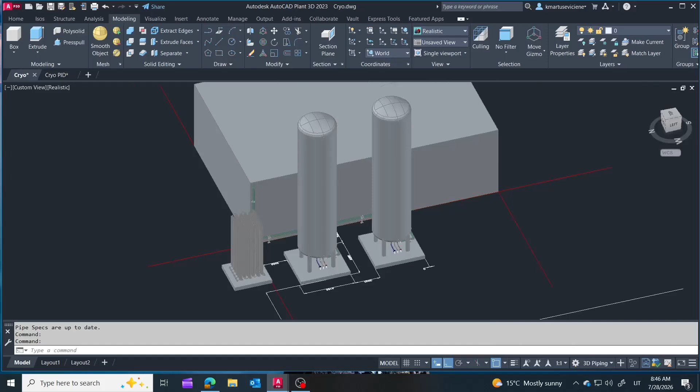In part 1, we built the complete cryogenic tank layout and routed the first pipeline. Today we're connecting the vaporizer, the cryogenic pump, and the gas return line while making the project look much closer to a real industrial installation. Let's continue.

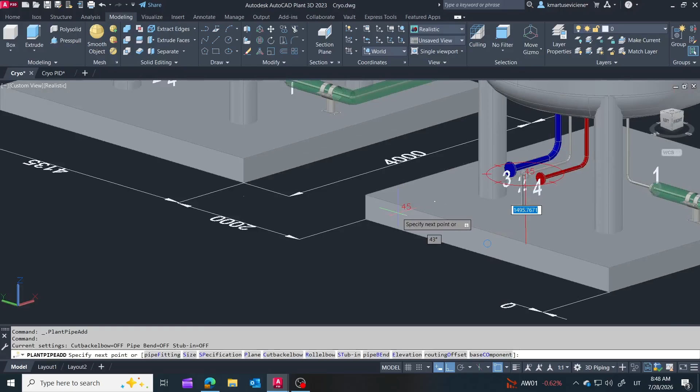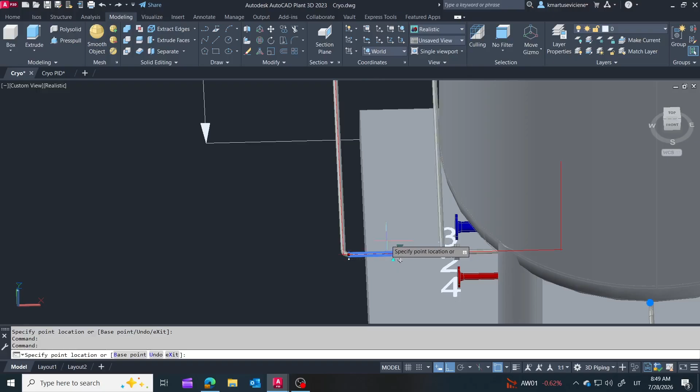In the previous video, we assigned the tank nozzles according to the P&ID. In this episode, we'll connect the second nozzle to the vaporizer. I aligned this pipeline with the foundation. During installation, workers can simply measure the distance from the edge of the foundation, making the pipe much easier to position accurately. Since the vaporizer connection is lower, I raise the pipeline only to the required height. This reduces the amount of support steel needed and saves material.

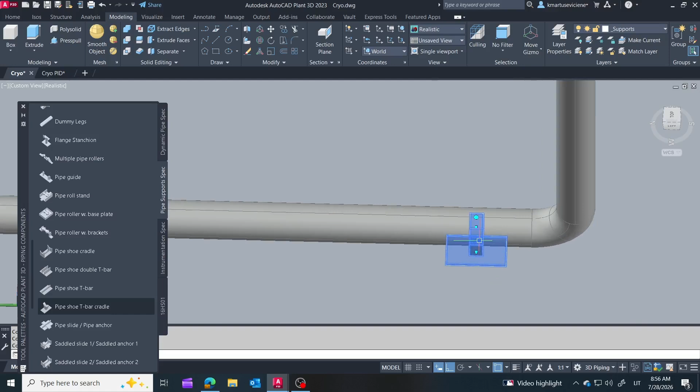Now I'm adding the pipe supports. Since this pipeline feeds the vaporizer, I let nature do part of the work. As the liquid nitrogen absorbs heat from the surroundings, it gradually starts to vaporize before reaching the vaporizer. Because of that, I can use simple pipe supports here. However, the supports should still be made of stainless steel, as carbon steel becomes brittle at cryogenic temperatures.

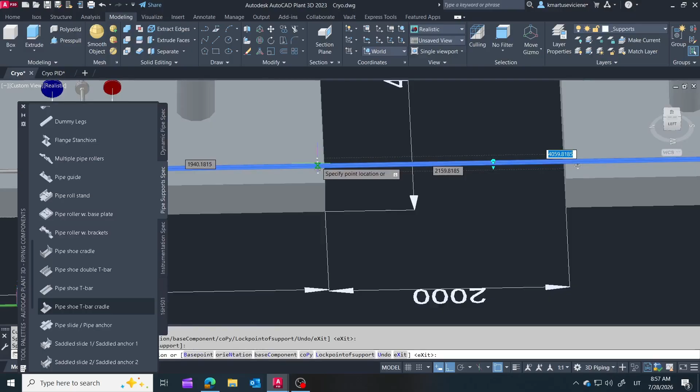Pay attention to how I place the supports. Using dynamic tracking, I position them at precise locations instead of placing them randomly. This gives us clean, round dimensions in the isometric drawings and orthographic views, making them much easier to read and fabricate.

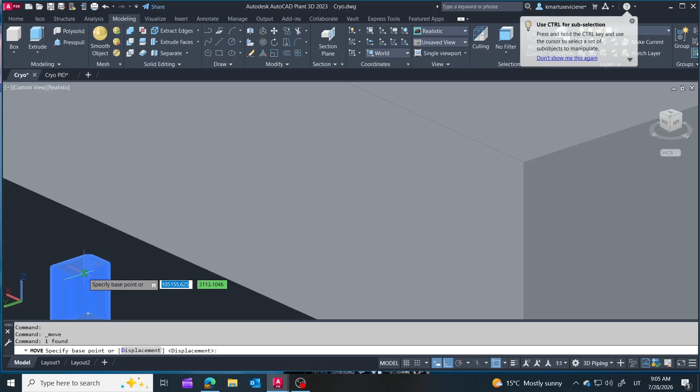This time, I'm using the same support design but adding a steel base plate at the bottom, which will be anchored to a concrete foundation. In other projects, when I want to avoid involving the civil team, I simply use supports with adjustable legs instead.

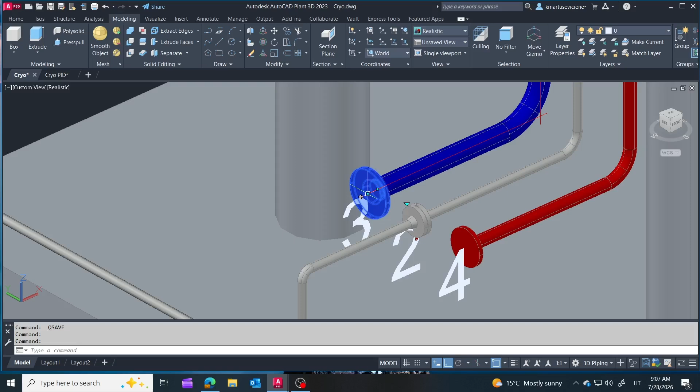Now let's start routing the DN65 pipeline to the cryogenic pump. This pump is used to transfer liquid nitrogen from the storage tank into road tankers. Before routing the pipeline, I'll adjust the pump foundation. I'll create a 600 by 600 millimeters concrete foundation at the same elevation as the tank foundations.

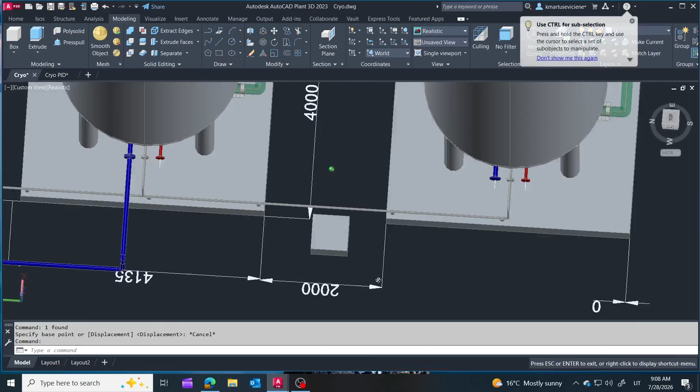Now I'll search GrabCAD for a suitable 3D model of the pump. There aren't many results, so it's easier to choose one. Since there aren't many models to choose from, I'll use the skid unit and simply extract the pump from it. This is a very nice model, so let's take a closer look.

On the suction side, we have an automatic valve. On the discharge side, the line already includes a cool-down line and manual cryogenic valves. By the way, I won't just use the pump from this model, I'll also reuse the valve models and the thermal relief valve.

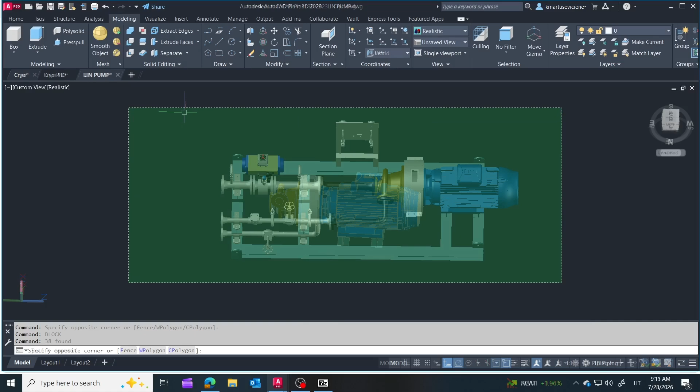Now I'll extract the pump from the assembly and place it on the foundation. I'll place the pump in the center of the foundation and move the entire unit slightly farther away from the tank foundations to leave more space for the piping.

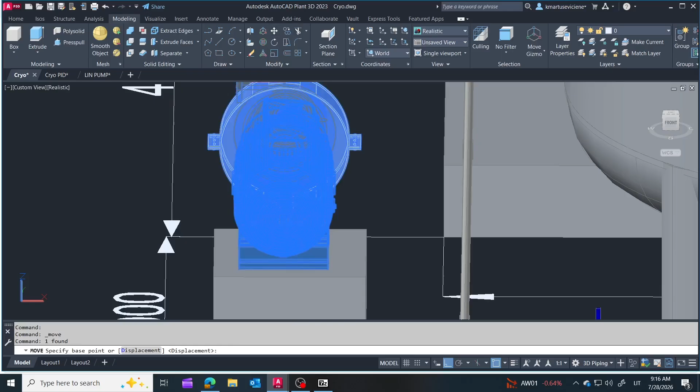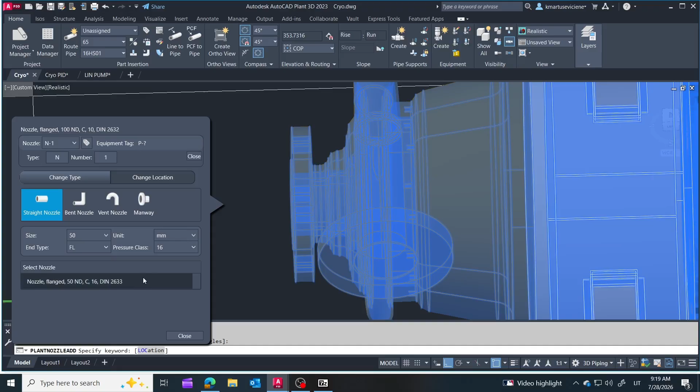Now it's time to convert the solid model into AutoCAD Plant 3D equipment. Since we simply picked the first suitable pump model we found, it actually fits this project quite well. The pump connections are DN40 and DN65, which match the sizes of our pipelines. For this workflow, we're not focusing on hydraulic calculations or equipment sizing, so I'll connect the pipelines directly without using reducers. In a real project, the process is different.

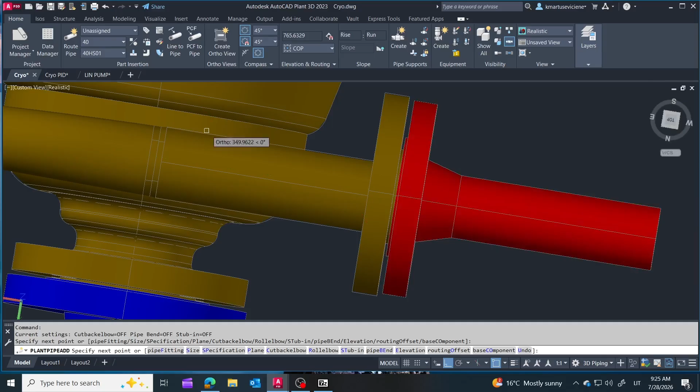First, you determine the required flow rate and size the piping accordingly. Once the pump manufacturer provides the final pump with confirmed nozzle sizes, you adjust the piping and add reducers if necessary to match the pump connections. I think I'll place the pump between these two foundations. If I position it next to them, it would block the truck access route, and I'd like to keep that area clear.

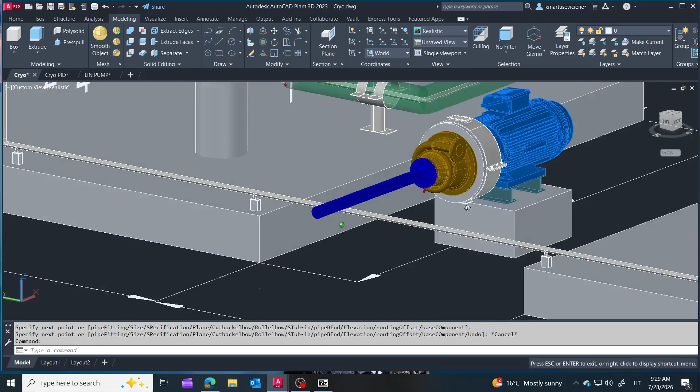Cryogenic pumps require special attention because they're handling liquids that are very close to their boiling point. Even a small pressure drop or heat input can cause part of the liquid to flash into gas. If vapor bubbles form at the pump inlet, cavitation can occur. When those bubbles collapse inside the pump, they can reduce performance, create vibration and noise, and eventually damage the impeller.

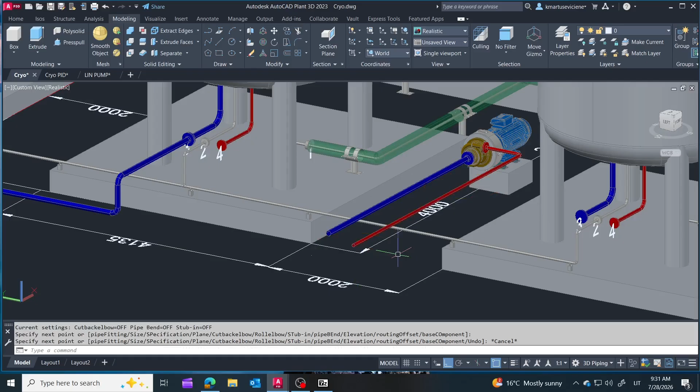That's why the suction line is usually kept as short and straight as possible with minimal pressure losses. The pump is also positioned below or close to the storage tank outlet whenever possible, ensuring a positive inlet pressure and helping to keep the nitrogen in its liquid state.

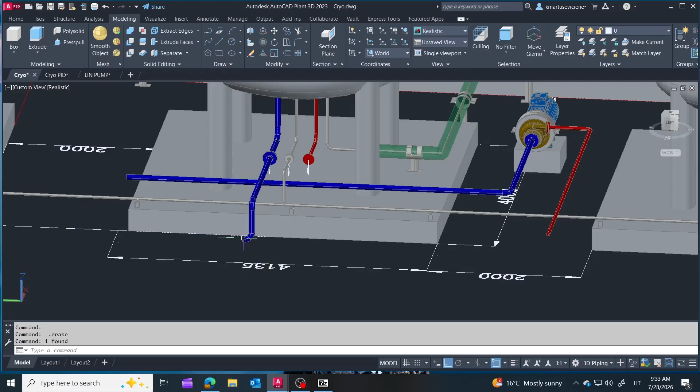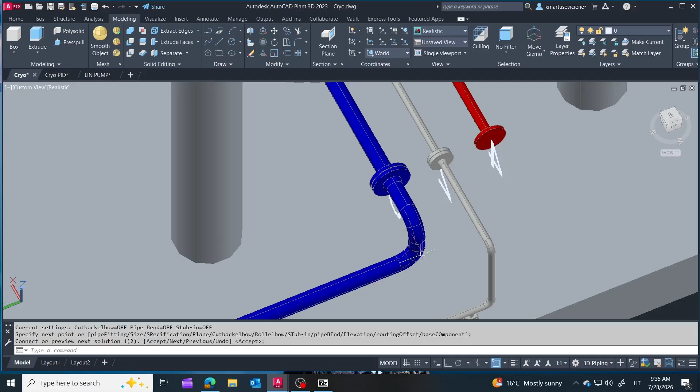Before any 3D modeling begins, every engineering project starts with the process requirements. We first determine parameters such as the required flow rate, operating pressure, storage capacity, fluid properties, temperature, and the overall process requirements. Based on these values, we can select the right equipment, for example, the pump, storage tank, vaporizer, and other components. Only then is the piping designed.

The pipe diameter is chosen to achieve an optimal balance between pressure losses and cost. A pipe that's too small causes excessive pressure drop, while a pipe that's too large increases material costs without providing much benefit.

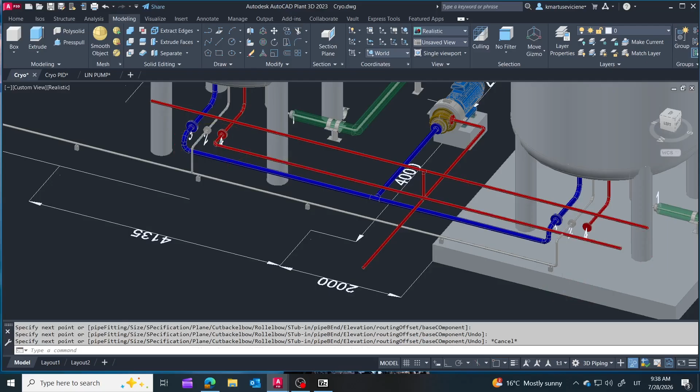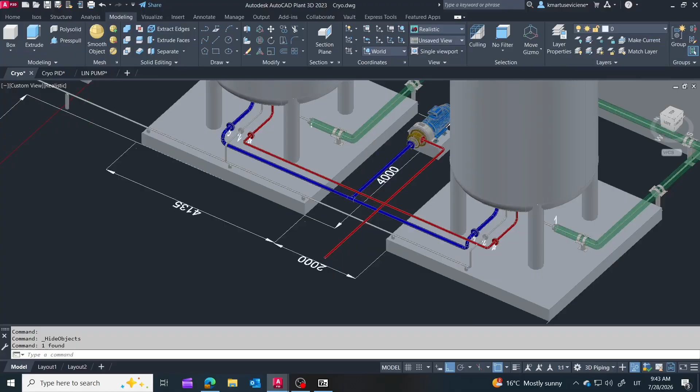The blue line is the suction line from the storage tank to the pump. The red lines are the discharge lines. One returns to the tank, while the other goes to the road tanker. Why are there two discharge lines? When a cryogenic pump is started, it's initially warm. As the liquid nitrogen passes through the pump, part of it immediately boils because of the heat stored in the pump components. During this cool-down period, the pump operates inefficiently and produces a significant amount of vapor.

Instead of sending that two-phase flow to the road tanker, the discharge is first routed back to the storage tank. This allows the pump to cool down to cryogenic temperature. Once the pump is cold and vapor generation is greatly reduced, the discharge is switched to the road tanker for normal loading. This is exactly the same arrangement shown in the GrabCAD pump model. The pump, valves, and recirculation line are all mounted on a single skid. If you watched the previous video, you may also remember that the same operating principle was illustrated in the pump manual.

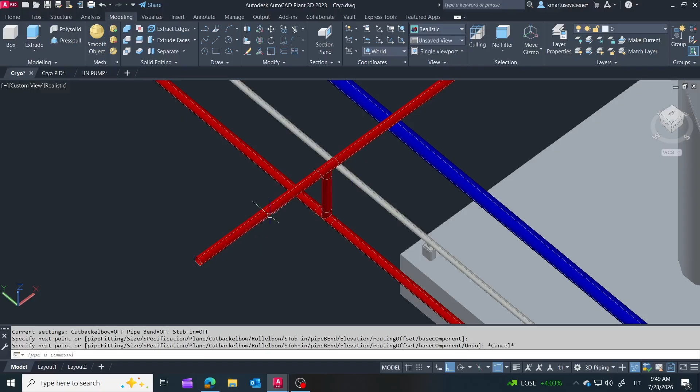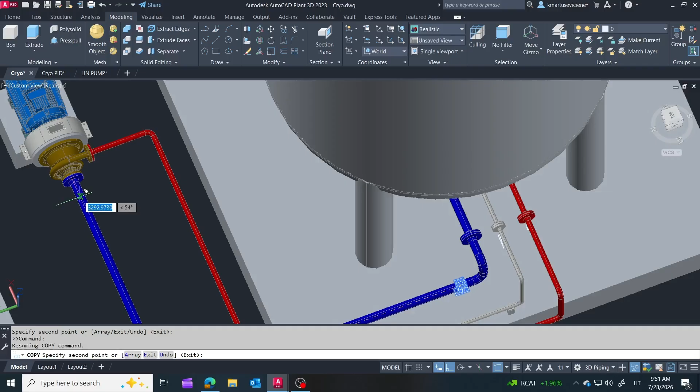The pipeline geometry is almost complete, so now let's continue with the supports. As a general rule, I place supports close to equipment nozzles and near heavy piping components. We don't have many of those components installed yet, but keep this in mind as the model develops. Supports are also commonly required near branches. Valves are especially important to consider. Even a relatively small valve is basically a solid piece of metal and can easily weigh around 30 kilograms. You don't want that additional weight hanging unsupported on the pipeline.

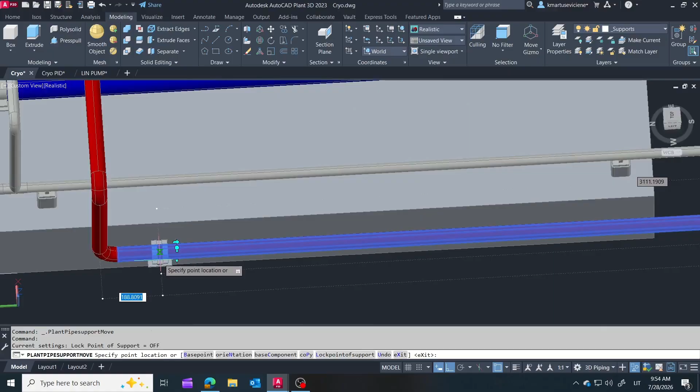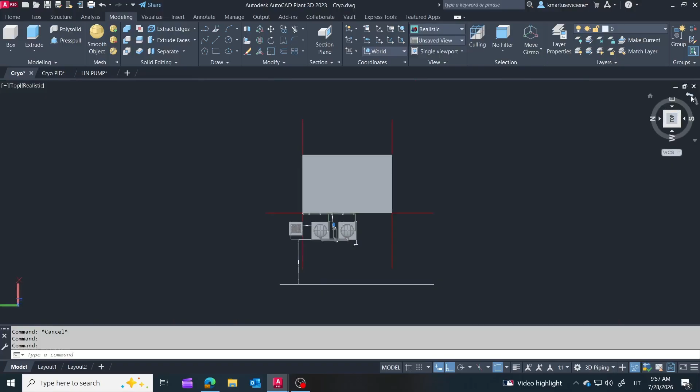So when placing supports, don't just look at the pipe length. Always consider valves, branches, equipment connections, and other concentrated loads. Now let's adjust the support appearance to match the cryogenic design. I always check the model from all sides. I try to keep the layout clean and tidy, making sure the pipelines are properly aligned in every direction.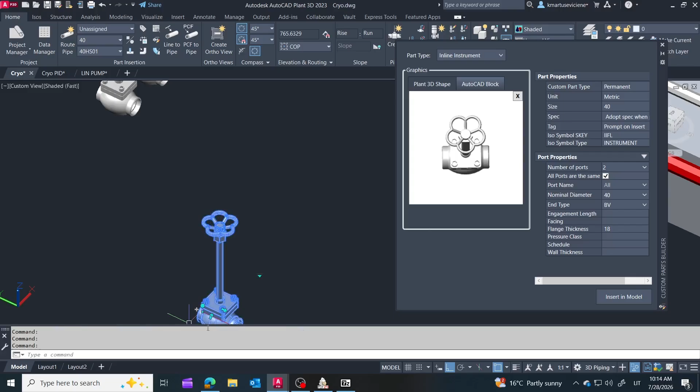Now let's start adding the piping components. I first try to find suitable cryogenic valves on GrabCAD, but as I mentioned before, we already have several good valve models in the pump skid, so I'll reuse those. One of the easiest ways to recognize a cryogenic valve is its extended stem or bonnet. The purpose is to keep the packing and operating mechanism farther away from the extremely cold fluid, where the temperature is much higher and the components can work properly.

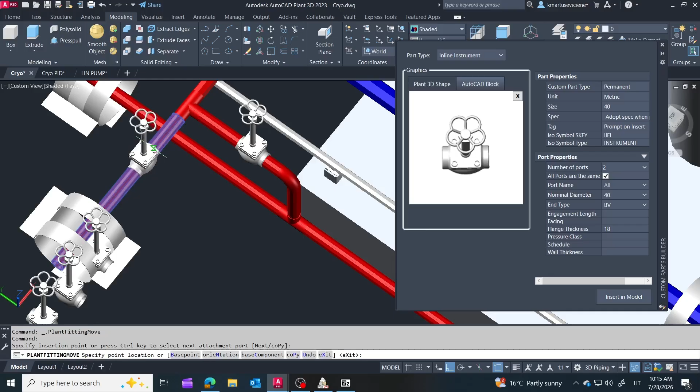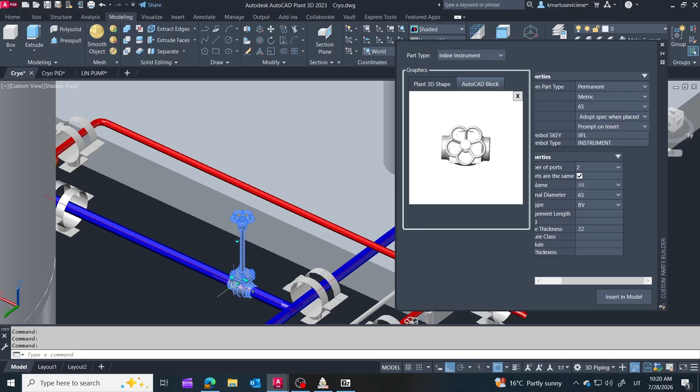For shut-off service, I'm using globe valves with welded ends. Why welded ends instead of flange connections? Flanges can certainly be used in cryogenic service, but they require more attention. You assemble the flange at ambient temperature, and once liquid nitrogen at around minus 180 degrees Celsius enters the system, the piping, bolts, and gasket all undergo significant thermal contraction. This can change the gasket compression and may require checking or retightening the connection during commissioning.

With welded connections, there is no gasket joint to worry about. You weld it, inspect the weld, and basically forget about it. Until the valve breaks, of course.

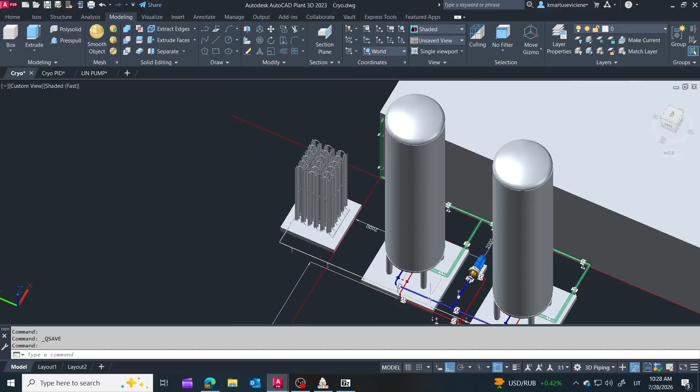Now I'm looking for a cryogenic expansion joint. It basically looks like a flexible corrugated metal section, usually called a metal bellows expansion joint. When the pipeline cools down from ambient temperature to around minus 180 degrees Celsius, the metal contracts and the pipe becomes shorter. In a long or restrained pipeline, this thermal contraction can generate significant forces and stresses.

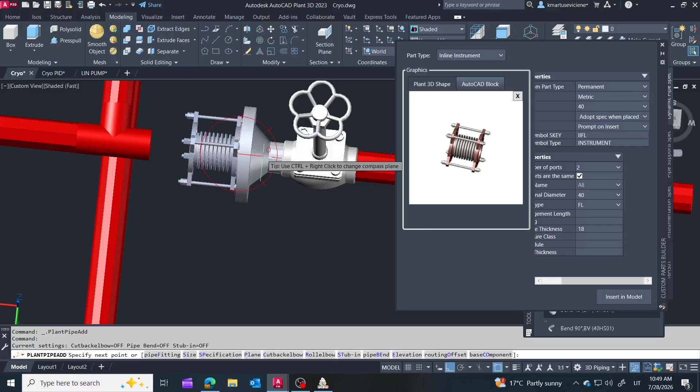The bellows can flex axially and, depending on its design, accommodate other movements as well. This allows the pipeline to absorb some of that thermal movement instead of transferring excessive loads to the piping, supports, equipment nozzles, or the storage tank. And because we're working at cryogenic temperatures, the expansion joint must be specifically designed for cryogenic service. It's not just a random flexible piece of pipe.

I'm going to rearrange the truck loading line in the same way I did with the pump. I want to keep the truck access area as clear as possible.

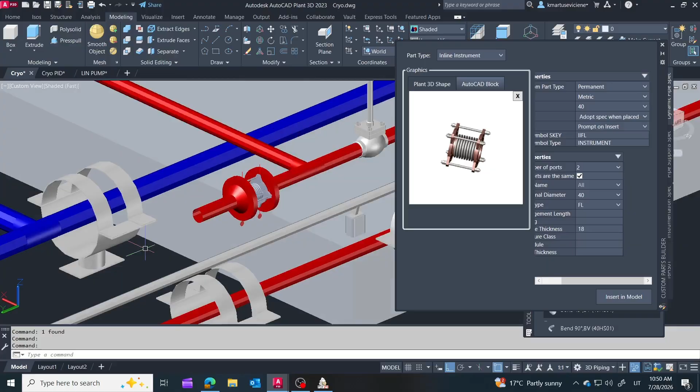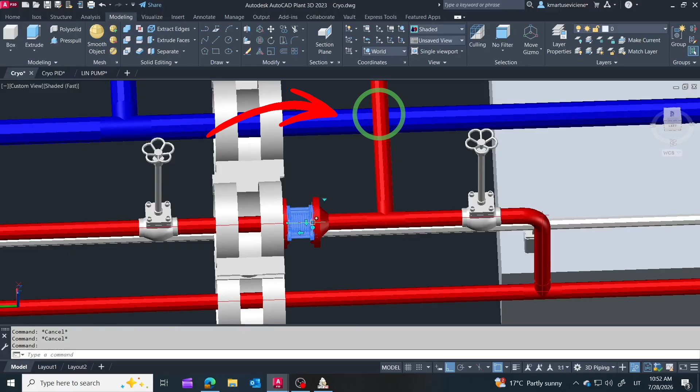Now that I'm editing the video, I can already see one thing I would change. I would place this expansion joint closer to the pump. And this happens sometimes in real design work. When you've been working on the same model for hours or even days, you don't always notice every questionable decision immediately. Then you come back the next day with fresh eyes, look at the model again, and suddenly you see things that should be improved.

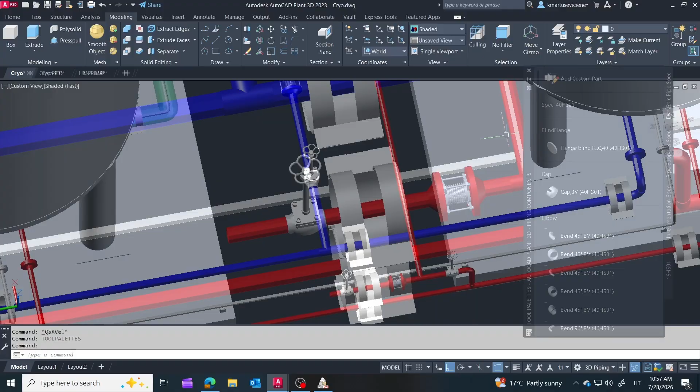That's completely normal. Engineering design is an iterative process. You model, review, adjust, and sometimes change decisions you made earlier.

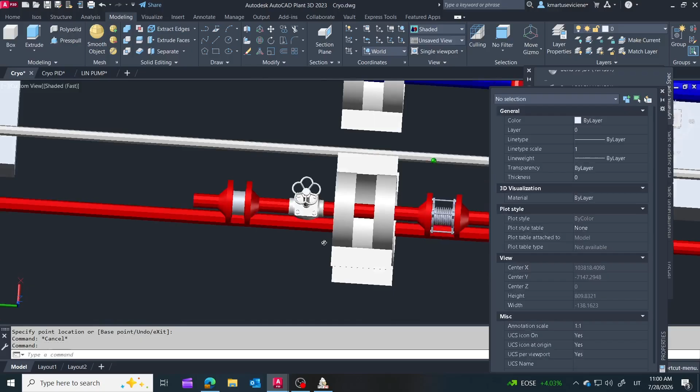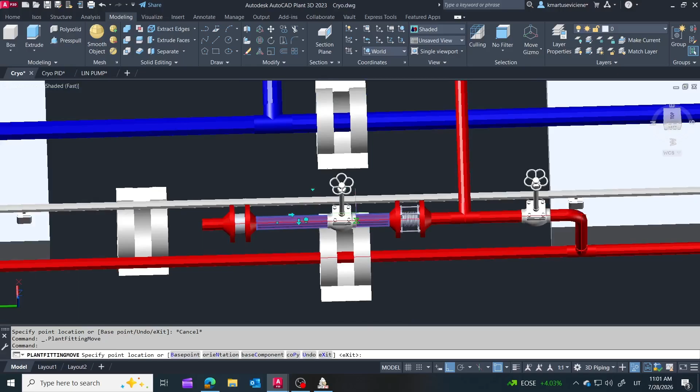On the discharge line, I'm adding a check valve to prevent reverse flow when the pump stops. I'm simply using one of the standard AutoCAD Plant 3D valves and changing its appearance to represent a simple wafer-type disc check valve. Unlike the welded shutoff valves we used earlier, this valve is installed between flanges. A check valve has an internal moving element, so it may require inspection, maintenance, or replacement during its lifetime. Using a wafer-type valve between flanges makes it much easier to remove and replace without cutting the pipeline.

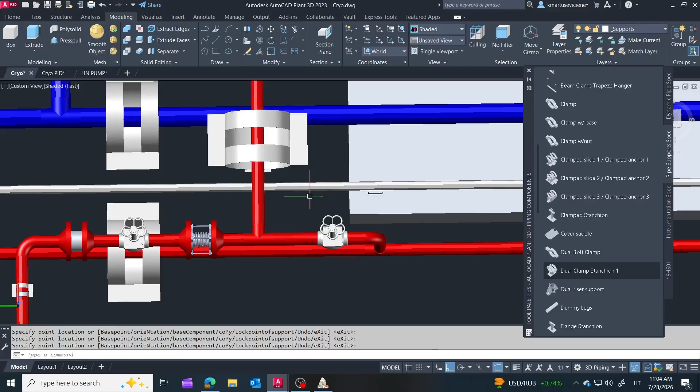I don't really like this large piping assembly with so many components and so little support. There are several valves and fittings concentrated in one area, which adds quite a lot of weight to the pipeline. So I'm going to rearrange the supports and provide better support around this assembly.

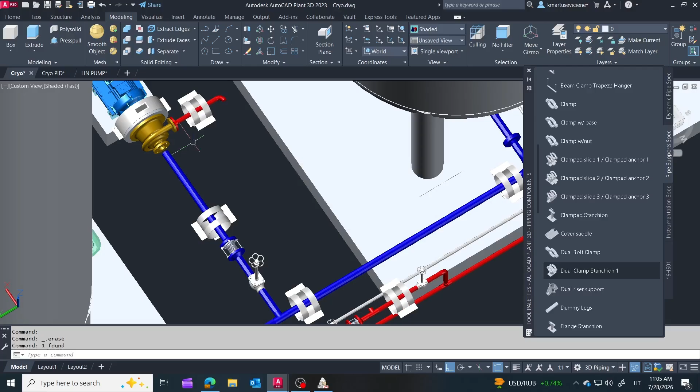Now that all the piping components are in place, we can move the pump closer to the pipelines and closer to the storage tank. This reduces the overall pipe length and, more importantly, keeps the suction line shorter. For a cryogenic pump, that's especially beneficial because a shorter suction line means lower pressure losses and less heat ingress, reducing the risk of liquid nitrogen starting to boil before it reaches the pump.

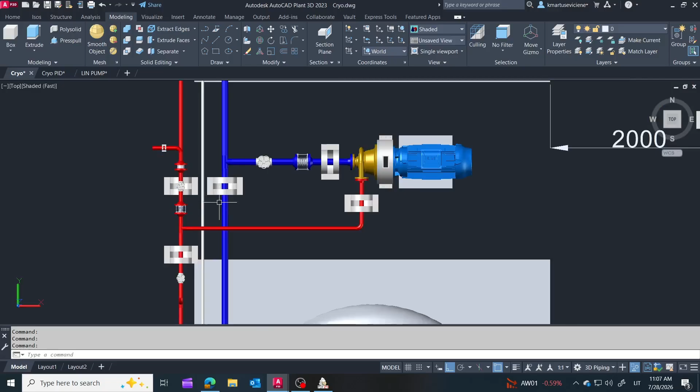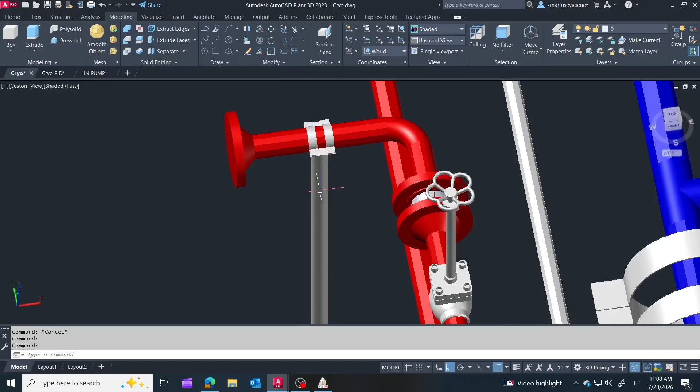For truck loading, a flexible transfer hose is normally used. In our case, a hose specifically designed for cryogenic service. Modeling a realistic flexible hose in AutoCAD Plant 3D is not very convenient, so for this model I'll simply add a flange connection point and leave it there. In a real installation, the end connection depends on the loading system and the tanker. Instead of a standard bolted flange, you may have a dedicated quick connect coupling that allows the operator to connect and disconnect the transfer hose much faster.

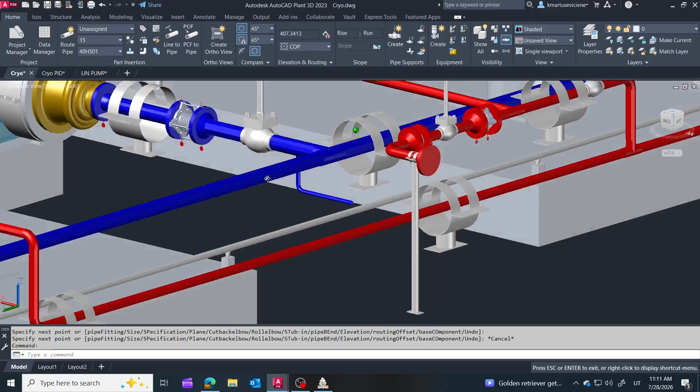One more small element to add: a filling connection for small liquid nitrogen containers, for example 5-liter vessels. For this connection, I'm using a DN15 branch with the same type of cryogenic ball valve. I take this branch directly from the liquid withdrawal line, upstream of the pump. For filling such small containers, we don't need the main transfer pump. The pressure inside the storage tank can provide the required flow.

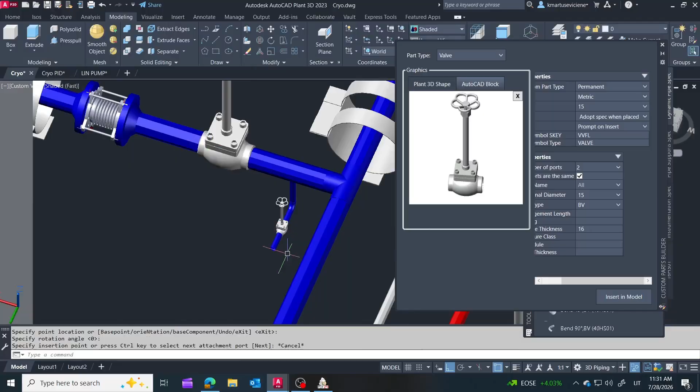Of course, in a real installation, this filling point would need additional details depending on the operating procedure, such as a suitable filling connection, safe venting, and protection against trapped liquid.

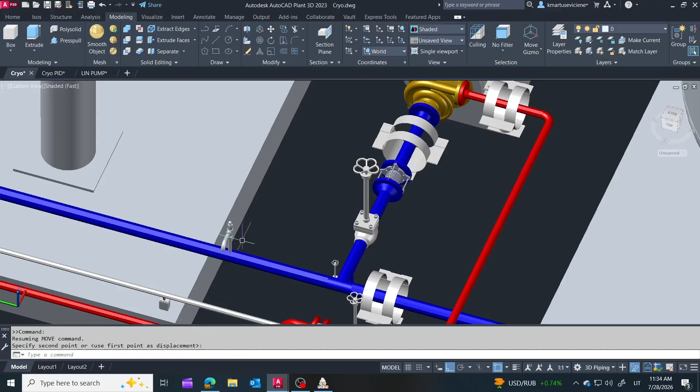One more very important device is the thermal relief valve. In cryogenic piping, liquid can sometimes become trapped between two closed valves. If that trapped liquid starts warming up, it expands very quickly. Because liquid nitrogen is almost incompressible, even a relatively small temperature increase can create a very large pressure rise inside that isolated section of pipe.

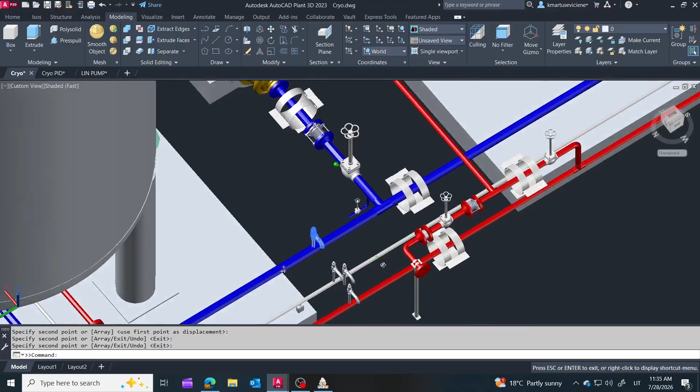The thermal relief valve protects the pipeline by opening at a preset pressure and releasing a small amount of fluid before the pressure becomes dangerous. So whenever liquid can be trapped between two isolation valves, we need to think about thermal expansion and provide pressure relief.

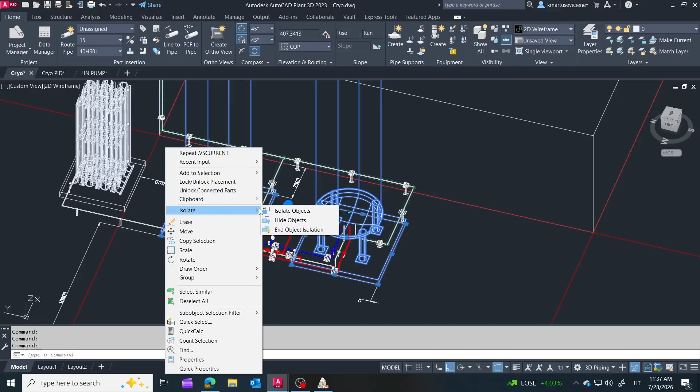And I think this is a good point to stop for today. The main piping geometry is now in place. We've added the pump, supports, valves, expansion joints, and some of the important safety components, but the project is not finished yet. In Part 3, we'll continue developing the model, add the remaining details, and bring this cryogenic installation closer to a complete, real-world design.